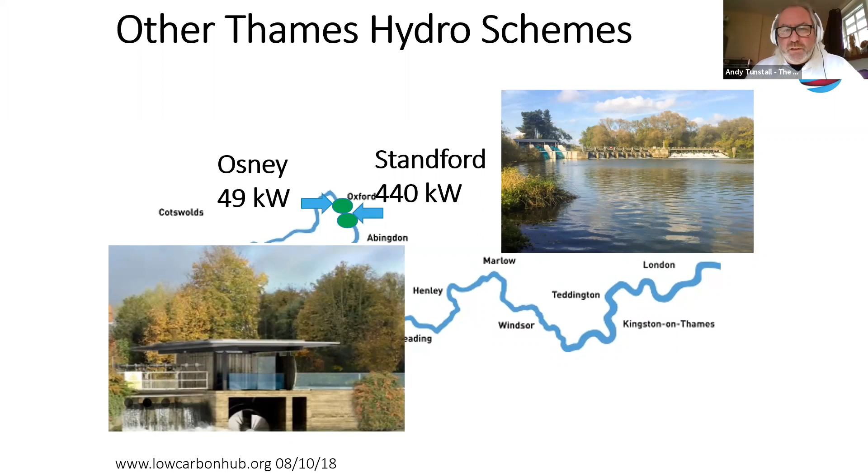So let's have a look at some schemes available on the Thames at the moment. Starting up in Oxford, on the bottom left-hand side, you've got a single screw system at Osney Lock. Further downstream, a much bigger scheme at Sandford, which has actually got 3 Archimedes screws side by side, in a similar conceptual position next to the Weir, as it will be in Caversham as well.

Then if you look down on the left there, Mapledurham Mill is a very ancient old water wheel, but next to it has been built a more modern system that powers energy for the estate. On the bottom right-hand side you'll see 2 quite large screws on the Thames at Romney Lock near Windsor, that actually provide the electricity for Windsor Castle. So the output of that system is used by the Queen.

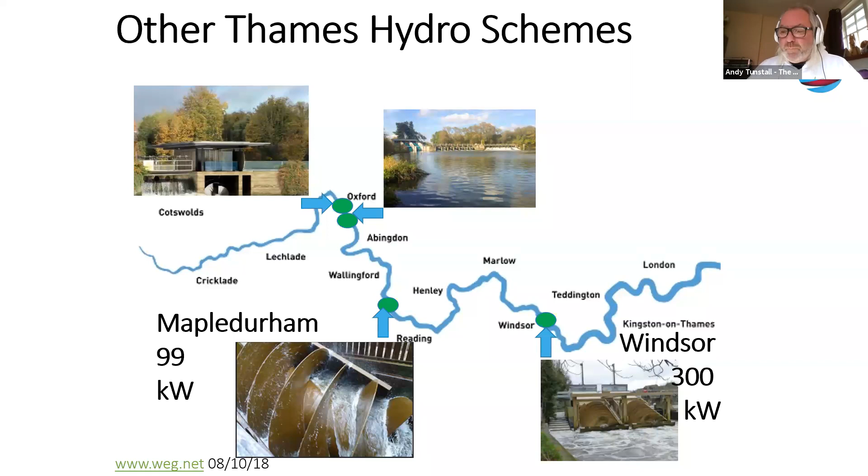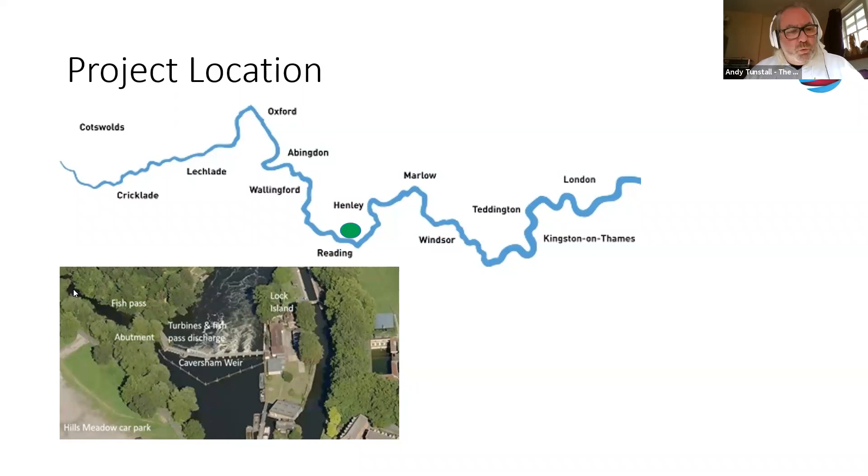So where our project is, in Reading. Reading is on the right-hand side of that map, and Caversham is on the left-hand side, on the north side. You can see there's the lock where boats can go through, there's the Weir, and then there's this little stretch of water here, which is exactly where our system is going.

So what we're having to do is construct here, just at the edge of the Weir, going along this side. This is called the mill race, this little amount of water. The mill race actually goes round the corner and back to the Thames over there. And there is apparently evidence of a mill in the Domesday Book here, so it's been used for this kind of concept before. But this is where we are going to build it.

We're going to point out this building here on the right-hand side. This is the old council-run open air swimming pool called the Lido, however you pronounce it, that is now a health spa owned by Thames Lido. This is important because we've got the ability to supply that entity directly, and that makes a big difference on the economics, because we're going to be supplying most of the output from the system to an end user customer at a higher price than we'd be able to export it to the grid. So that makes a big difference to the economics of it.

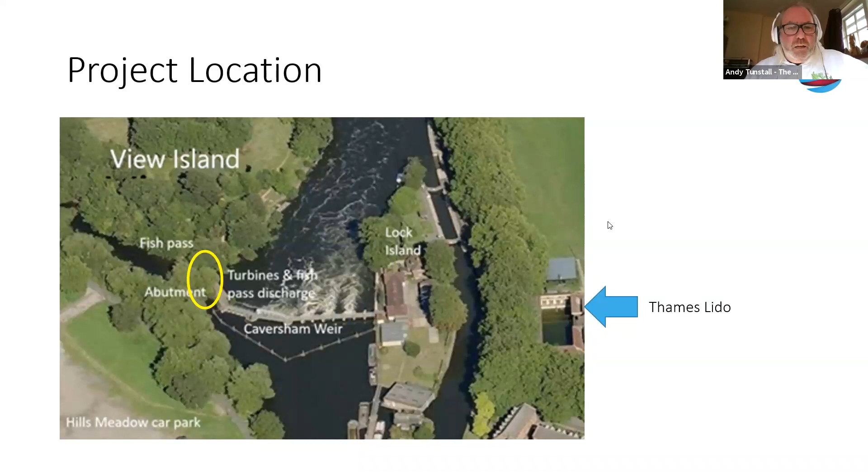Okay, so this is the kind of technology we are using. They're technically called reverse Archimedes screws. The ancient Archimedes screw invention was all about having a device which could lift water up from a lower level river to a higher level, in order to irrigate fields and so on. These work in reverse: you've got the weight of the water flowing through it, going downhill, and it's the gravity that turns the screw, which goes via a gearbox to a generator and produces the electricity.

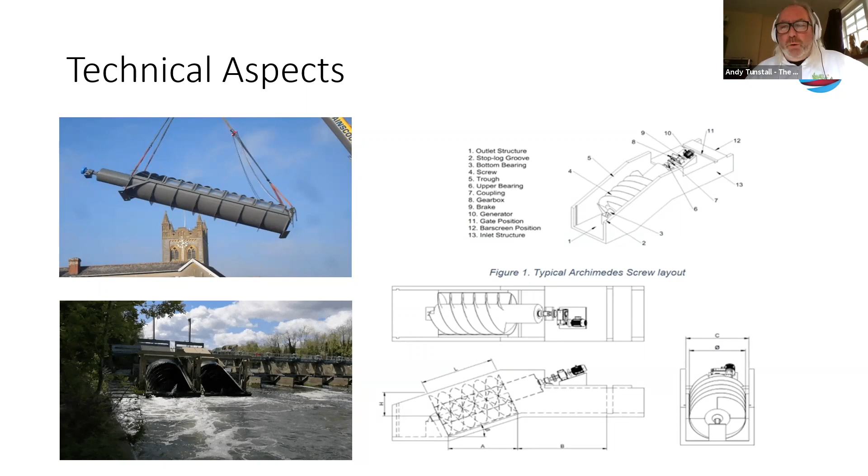So what sort of electricity is generated from this? There's a formula which says that the output of a hydro system is proportional to the height of the flow of water times the flow of water. At this particular site, the average drop between the higher part of the river and the lower part of the river is 1.4 meters, which is relatively low. What we're using there is 2 quite small turbines, 2.4 meter diameter screws, to extract the potential energy from the water flowing down through.

So, as in all hydro projects, you have something called a flow duration curve, and this shows you when the system will generate power. If there's too little water, it can't generate, and if there's too much water, the Environment Agency insists that we effectively lift the screws out of the water to let more of the water flow through, so that you don't get flooding.

This sort of cut in and cut out means that it's not a 24/7, 365 days a year operation, but it does have probably the advantage over solar, which is obviously only available during the day, and wind, which is only available when there are reasonable amounts of wind. But indeed, wind has a similar issue between cutting in and cutting out. So basically, this system will operate something like 70% of the time.

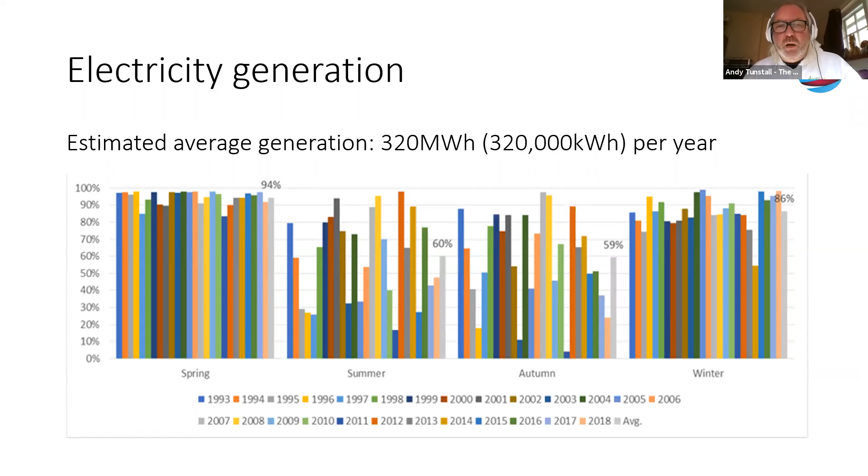So when you take the output and you take the time and you multiply them together, you come out with 320,000 kilowatt hours per year, which is effectively about the same amount of electricity that would power 90 homes at average consumption. So it's not a massive system.

So when we've done that initial work, we came up with a budget estimate to build it of 700,000. The two big elements you can see at the top were the actual turbines themselves, which basically cost £250,000, and the civil construction costs. This is about basically breaking into the footpath area at the top of the weir, damming it off, building a cradle for which the screws can then sit in, and then all of the electrical equipment is then connected to it. So the construction costs were quite big there.

You'll see an item there called a fish pass. This is a way of letting fish like salmon and eels go back upstream. Now, there was a fish pass on the weir at the moment, but I've heard it described to me that only the most athletic fish and eels could possibly use it because it's very short and very steep. So the Environment Agency insisted that we put in a proposal to do a much more natural, gradual steepness of fish pass, so that those kind of fish could actually get upstream if they wanted to.

And then you can see there's bits about connecting to the grid or the end customer, which is what we're actually going to do in the end, and then actually raising all the money and some contingency elements there as well. So that's what we needed the money for.

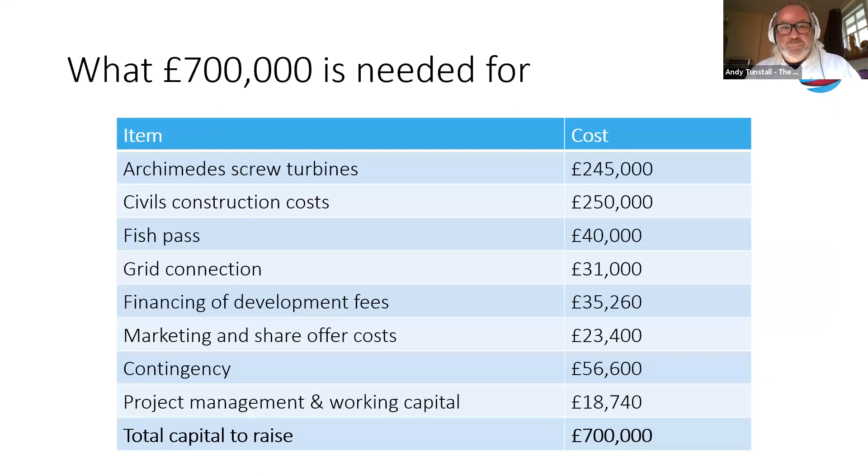Now going into a bit more detail. In terms of capital, you've got to actually build the thing, and then we've got to replace the generator at a 20-year period. But in 20 years, that generator will cost more than it does at the moment, so we've had to think about how much it would cost today and what inflation factor to apply.

Similarly, for the operating costs, we've got a base amount, which we said was £15,000, and then we've applied an inflation figure to that as well. And then our revenue, we've talked about the three avenues of that.

We've got some output, which is the same for the first 20 years and then goes up for the last 20 years. We've got the feed-in tariff, which we get on all of the output for the first 20 years. We've got the direct supply to the end user, which again we've assumed we'd do for 20 years, and then we're just supplying the grid after that. The grid supply is at the wholesale price.

Again, we've got to think about inflation, because the feed-in tariff is mandatorily linked to inflation as part of the government calculation. With the direct supply, we've agreed a power purchase agreement with the Lido, which again has an inflation element to it. The wholesale price is a bit more of an unknown, but one key thing is that the change in wholesale electricity prices over the last 10 years has matched the normal inflation rate as well. Then we've got base prices to bring our total revenue.

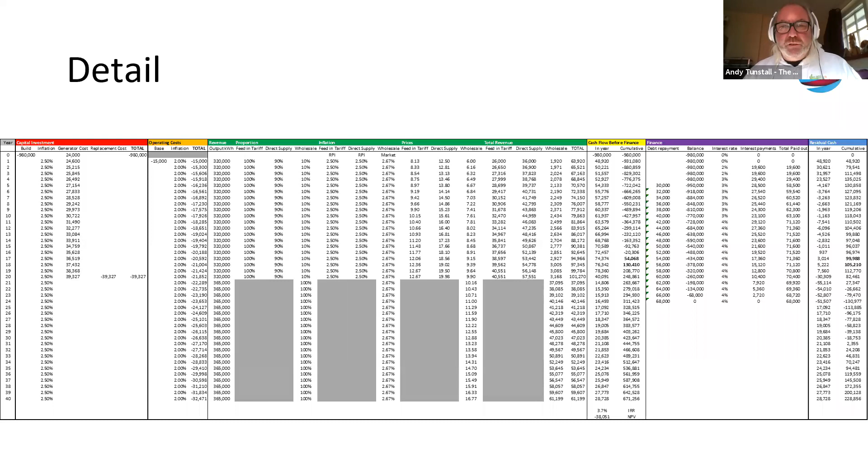You could do exactly the same calculation with wind, but the big difference going forward at the moment is that feed-in tariff column has disappeared, because you don't get feed-in tariff on any of these investments anymore. You're going the wrong way here.

So if we ignore the financing, you can see that we start at basically minus £1 million, let's call it in round figures, and you get to break even in about year 16, and then you build up a surplus over the rest of the period. But that's before financing, every time.

If you start looking at the financing, so this is to remember to repay the capital and the interest to the investors, and you've also got a slightly lumpy replacement of the generator in year 21. You get this quite odd sort of curve there, but what you do get on the far right hand side is the size of the community benefit, which is over £200,000 over the whole of the 40-year period, but the majority of that is in the last 10 years of the operation of the scheme.

Okay, so let's talk about raising the money for it. We had our target of £700,000, and we decided to run that in the first 6 weeks of 2020. We gave people the ability to pre-register for the shares in the last 2 weeks of 2019, and then the main share raise was until Valentine's Day. We thought that was quite symbolic, in February. So that's how that worked.

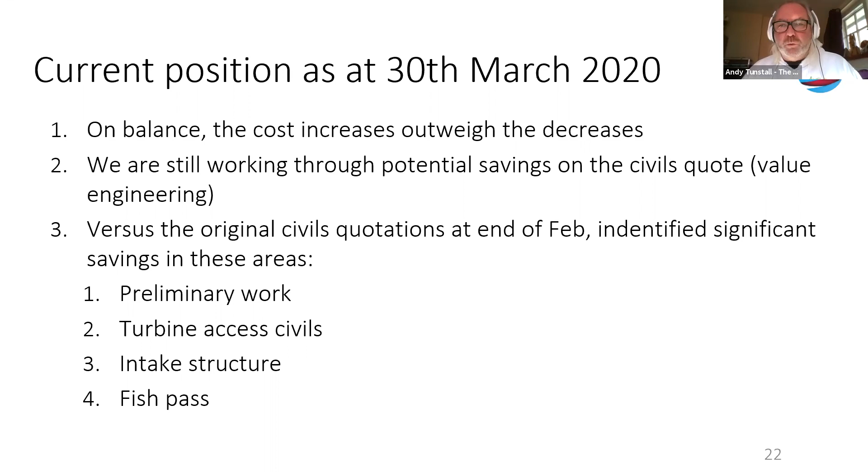So what we spent a lot of time doing was trying to look at various different ways that we could value engineer the solution so that we could still make it functional but cost less. And what that has meant is that the cost has gone up quite dramatically, but it could have gone up by a lot more as well. So it's all credit to the project team who are working on this that actually managed to find some solutions.

The other thing that happened after the raise, of course, is COVID. And what that meant was that we had a lot of people that we wanted to help us with the design, and they certainly weren't available because they weren't allowed to work. So a lot of people were furloughed. So all of the decisioning that we had to make took a lot longer than we thought it was going to do.

So we had hoped to build it in, to be complete in about November 2020. And because we couldn't start that preparatory work and we didn't get finalisation of all the things, then that's been pushed back a little bit as well.

We also got in touch with Ofgem because we were on a 2-year construction thing to qualify for the feed-in tariff. So that would have expired at the end of March 2021. And we have got an extension, I think it's of another year. That's happened again because of COVID. So that's not helped our situation here particularly.

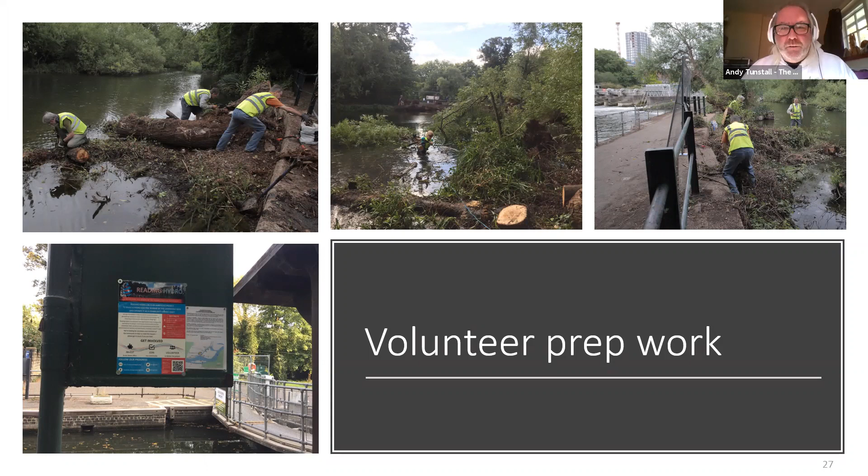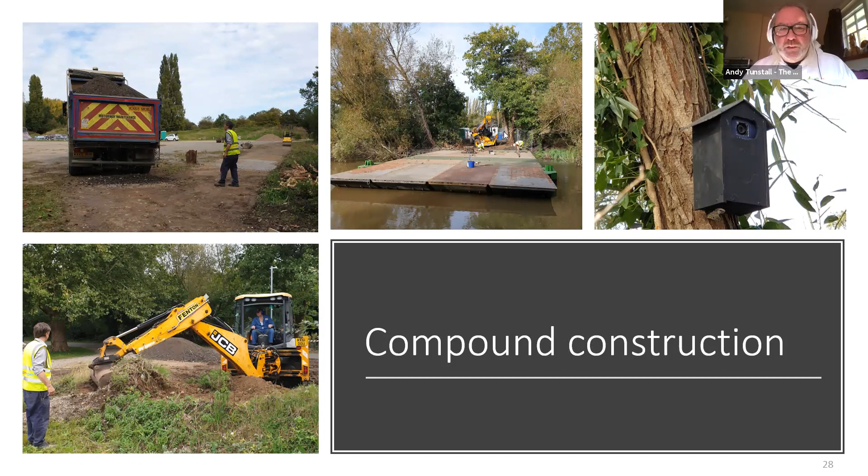And there you go, you can see we had to put all of the big machinery on the car park side, which, if you know it, is on the north side, the big public car park there. So we've had to build a compound there and then build a pontoon bridge to get from the car park over to the island so that we can get the really heavy materials over.

So it's big stuff, and you can see why the costs of this probably came in more than expected. As an example, here's a machine actually being brought up to the construction site on a barge. There were various different ways we thought we would have to do this, but the answer was to do that by barge.

So I think in summary, it's a classic example of a project that's cost a little bit more. It's not unique in this, even in hydro schemes. There was a proposal to do one of these in Abingdon, further upstream. The original budget was £1 million, which they looked like they were well on the way to raising. Once they'd done the same sort of civil construction detail that we've done, the budget went up to £3 million, and that just blew the economics. So that project didn't happen.

It's great that we're still able to produce something that's a low carbon production system. It's great that it will still produce some community benefit and give the investors a return on their investment. In the absence of a feed-in tariff, though, I can't see that these kinds of schemes are repeatable, because if we didn't have the feed-in tariff revenue for this project, it would not be viable. So it's difficult to see how, with the current level of electricity prices, you could make such a scheme work unless you had a very low cost place to put the hydro system in, and you could sell all of that output to a final end user.